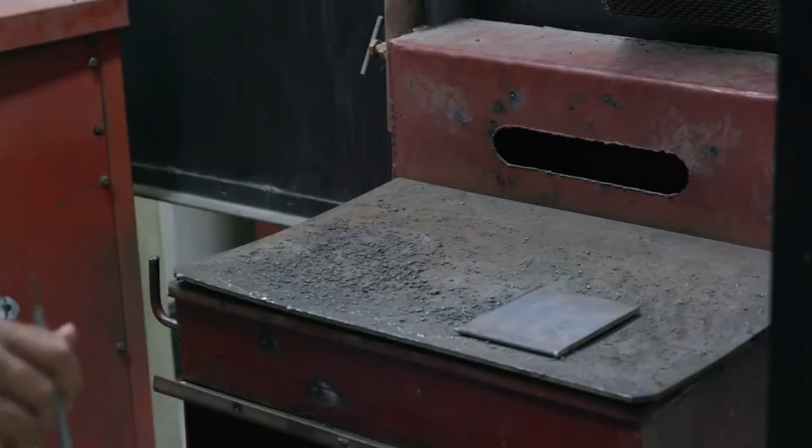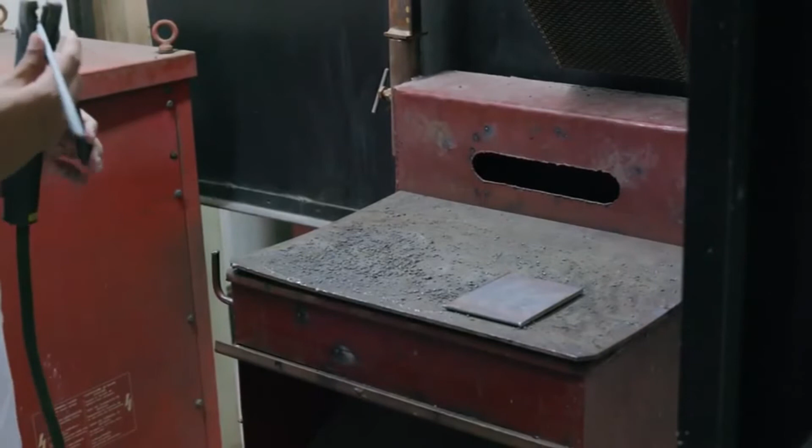In my hand is this welding electrode, and this is the electrode holder which will be used to hold the electrode. This is our work table, and this is the workpiece which we'll be welding. The work table is connected to the power source, and the electrode holder is also connected to the power source.

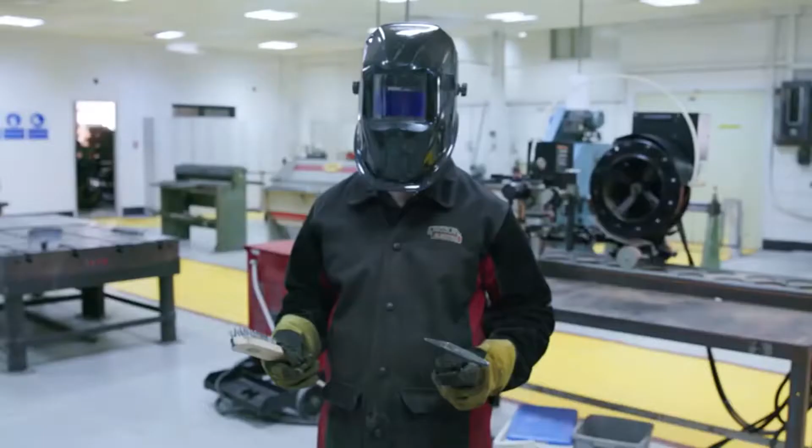Before we start any welding, there are some safety precautions we need to follow. While performing welding, we always need to cover our face with a face guard. On the hand we need to wear gloves, and while welding we should never touch the workpiece with our hand. There is always a hammer and wire brush to clean the material. These are the safety precautions we need to follow before performing any welding - face guard should be there, gloves should always be there.

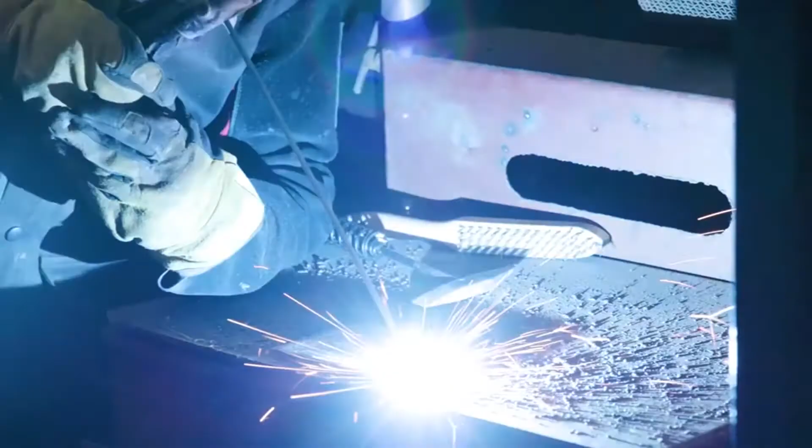This is how we perform the actual arc welding operation. The electrode rod is brought near the workpiece. When the electrode rod and the work table are both connected to the power supply, an electric current is passed through the complete circuit. Due to the passage of electric current, an arc is produced. Due to the heat generated, the metal gets melted and joined with each other. This is the basic principle of arc welding.

You can see the electrode is brought near to the metal surface. Due to the arc, metal is melting and welding is done.

Always you should follow safety - face guard should be there, gloves should be there.

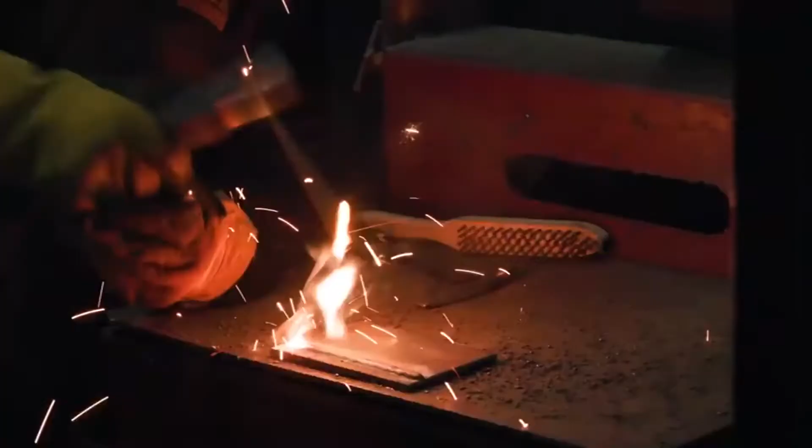You can see we are performing welding in a straight line. So this is how welding in a straight line has been performed.

To clean it, we'll use a hammer and a wire brush. Never touch it with your hand. This is the wire brush which will be used to clean the joint after welding has been performed. Never touch it with your own hand - always use the wire brush and the hammer.

This is the arc which was produced due to the passage of electric current.

As I said, this work table is connected to the power source, and this electrode holder is connected to the power source. We'll put the electrode inside this and bring it near to the workpiece. Due to the passage of electric current, current will pass through it and heat will be generated. Due to the heat, the metal will melt and get welded to each other. This is the basic principle.

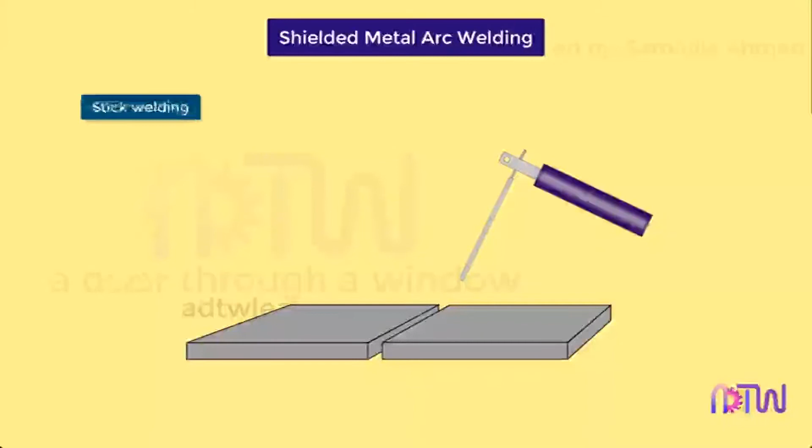Shielded metal arc welding is also referred to as stick welding or manual metal arc welding, in short MMAW, in which an arc is struck between the flux-coated consumable electrode and the base metal to start the welding process. It is the most common type of welding process seen in any job shop industry.

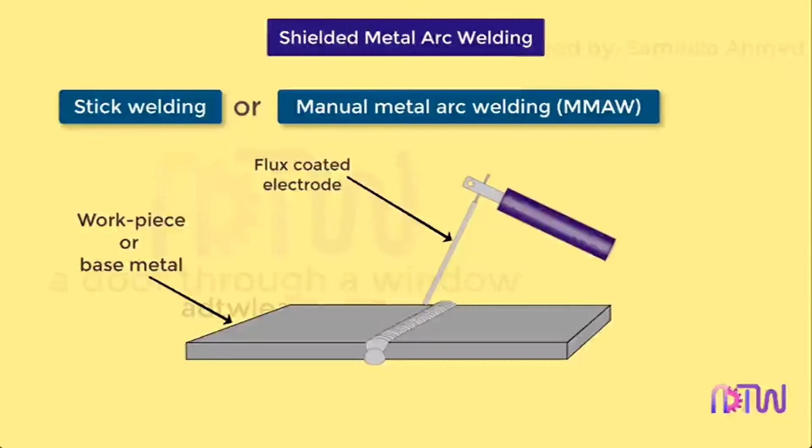Working principle: in this process, the heat required to melt the consumable electrode and form a bond with the base metal is produced by an electric arc struck between the electrode and the workpiece. The shielding for the weld pool is provided by the flux, some of which is deposited on the layer of the weld in the form of slag, which is removed upon cooling.

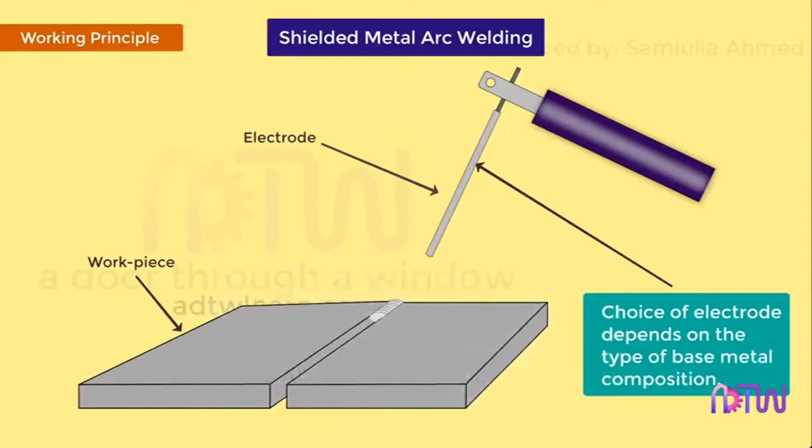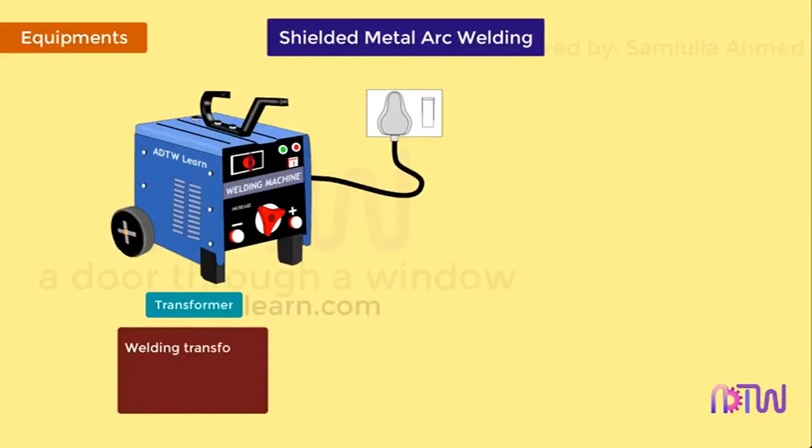The choice of electrode depends upon the base metal. Equipment or components of shielded metal arc welding: power supply - transformer. Most commonly, a welding transformer, a DC rectifier, or a DC generator is used. Other components include the electrode holder, electrode, and ground clamps.

Working: first, the power adjustments are made on the transformer. The welding can be carried out by either using direct current electrode positive (DCEP) or direct current electrode negative (DCEN) connection.

In DCEN, the electrode is connected to the negative terminal and the workpiece is connected to the positive terminal. The electrons thus travel from the negative terminal to the positive terminal, that is, from the electrode to the workpiece.

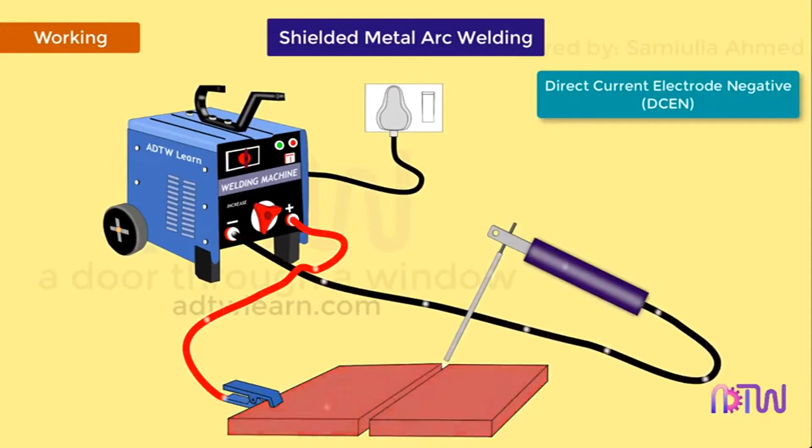Since there is a sufficient potential difference between the electrode and the workpiece, the electrons from the electrode accelerate and strike the workpiece surface at a very high velocity. Upon striking, the kinetic energy of the electrons is converted into heat or thermal energy, thus an immense amount of heat is generated at the workpiece surface.

About 66% of the arc heat is generated on the surface of the workpiece, and the rest is generated at the electrode surface. This melts the base metal quickly, resulting in deeper penetration. However, the deposition rate of the filler metal reduces due to less heat generation at the electrode surface.

DCEP. In this polarity configuration, the electrode is connected to the positive terminal and the workpiece is connected to the negative terminal, hence the flow of electrons is from the workpiece to the electrode. A major amount of arc heat is generated at the surface of the electrode and less heat at the workpiece surface, resulting in a higher filler deposition rate and insufficient fusion between the workpiece and filler metal.

However, when the electrons flow from the workpiece, the dirt and oxide layer is disrupted, also known as arc cleaning action, thus helping in producing a quality weld bead.

After setting the necessary current and voltage parameters, an arc is struck by slightly touching the workpiece with the electrode and carrying forward or backward.

Once the arc is struck, the heat generated melts the electrode and base metal, and the filler metal gets deposited on the base metal. The electrode should be held at a lower angle to the workpiece to initiate an arc

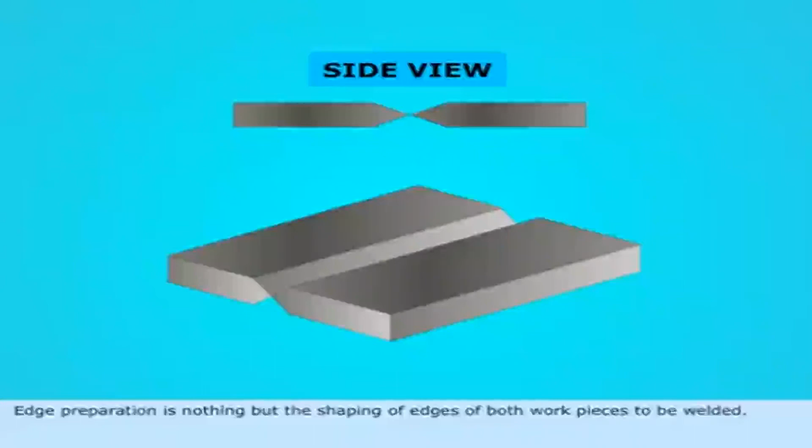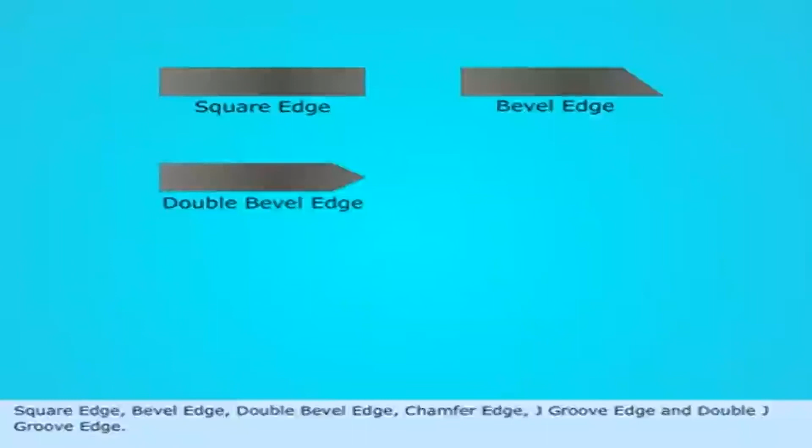Edge preparation is nothing but the shaping of edges of both workpieces to be welded. The most common edge preparations are: square edge, bevel edge, double bevel edge, chamfer edge, J-groove edge, and double J-groove edge.

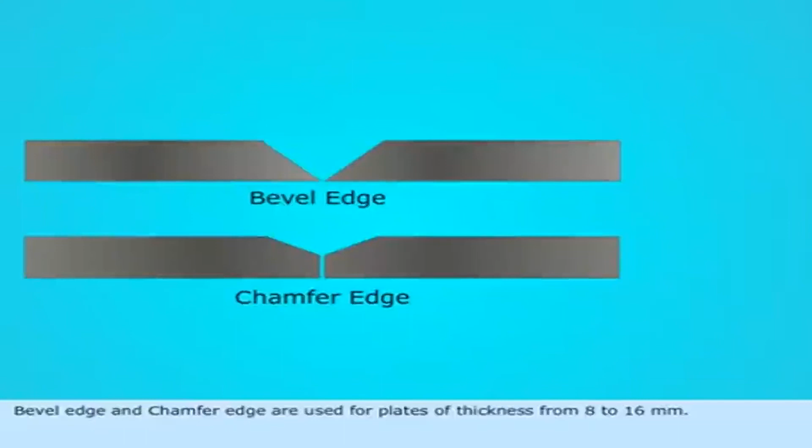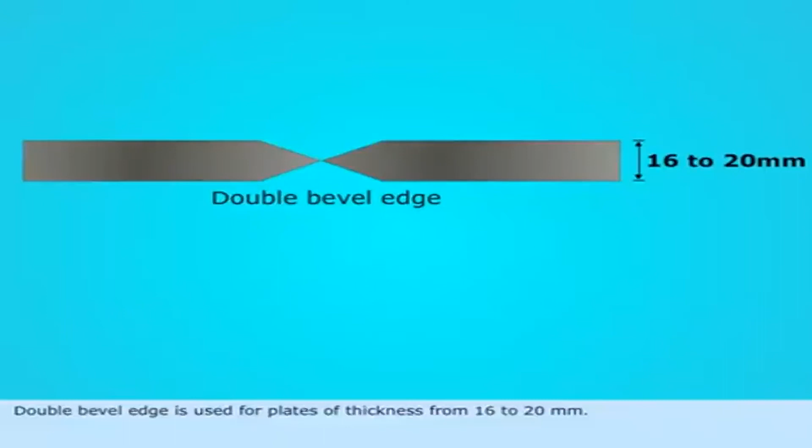Square edge is used for welding plates of thickness from 3 to 5 mm. Bevel edge and chamfer edge are used for plates of thickness from 8 to 16 mm. Double bevel edge is used for plates of thickness from 16 to 20 mm. Single and double J-groove edges are used for plates of thickness more than 20 mm.

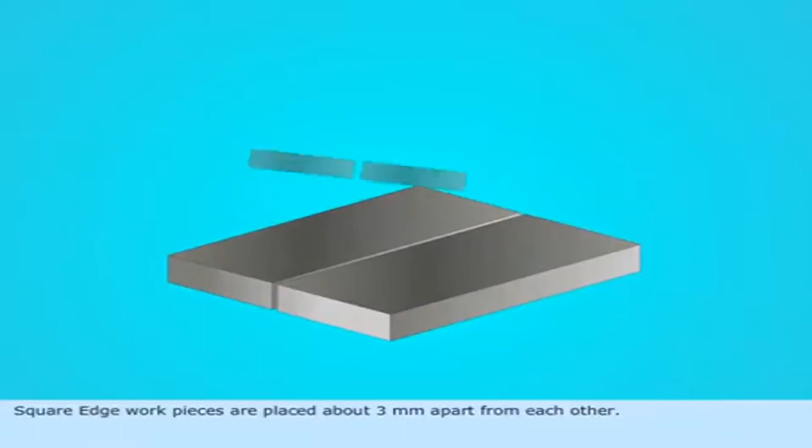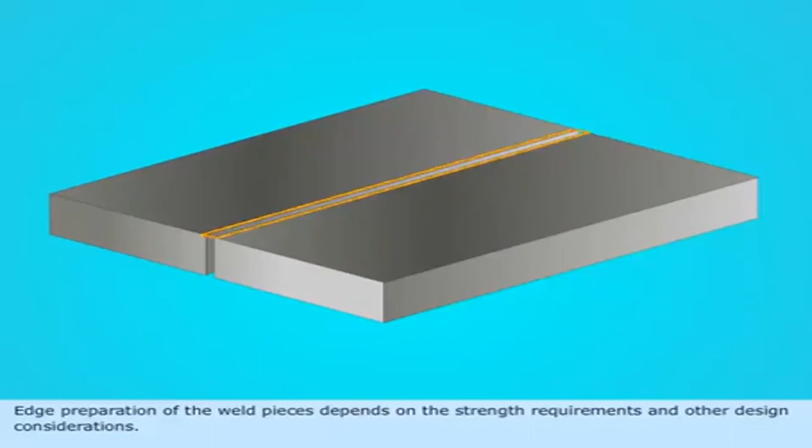Square edge workpieces are placed about 3 mm apart from each other. For the workpieces of double bevel edge and double J-groove edge, welding is done on both sides of the workpieces. Edge preparation of the weld pieces depends on the strength requirements and other design considerations.

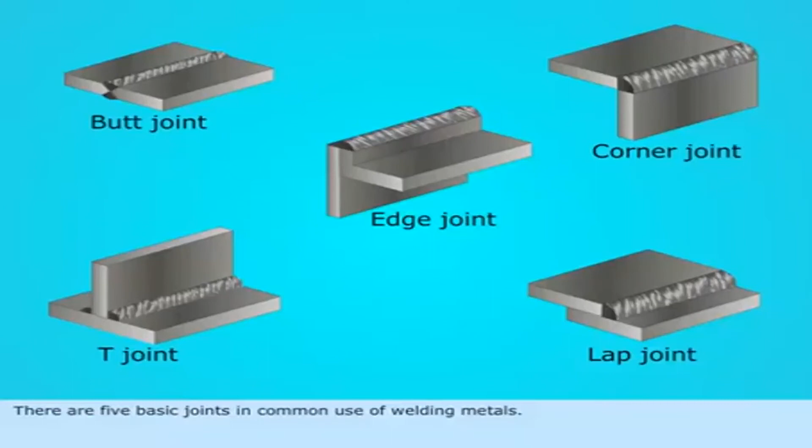There are 5 basic joints in common use of welding metals. They are butt joint, lap joint, T-joint, corner joint, and edge joint.

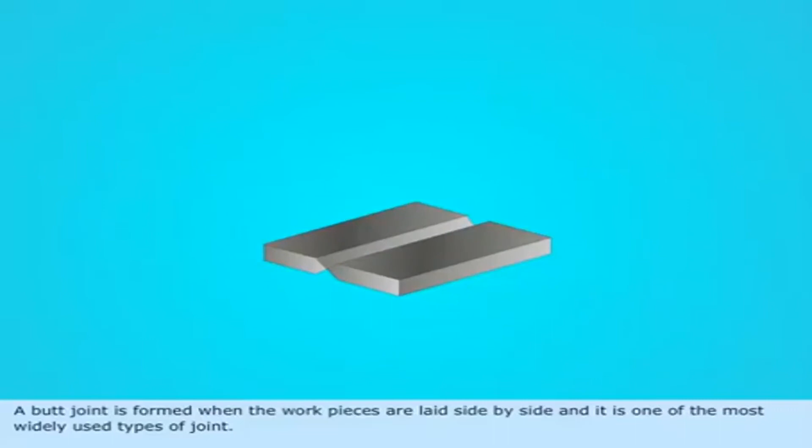A butt joint is formed when the workpieces are laid side by side, and it is one of the most widely used types of joint.

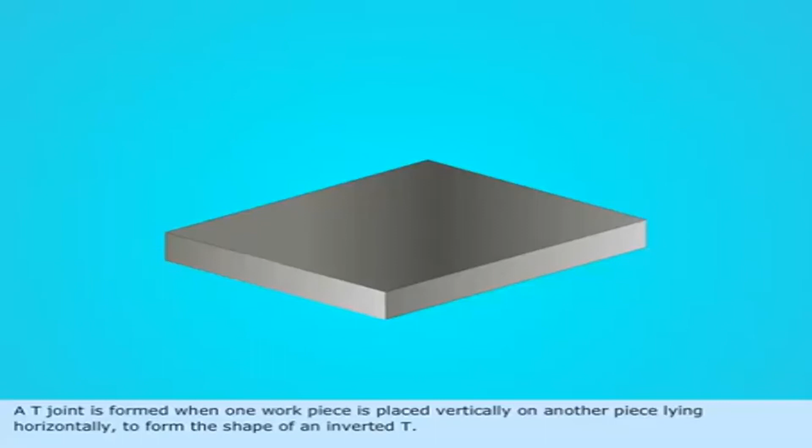A T-joint is formed when one workpiece is placed vertically on another piece lying horizontally to form the shape of an inverted T. The vertical workpiece is usually placed at 90 degrees to the horizontal workpiece.

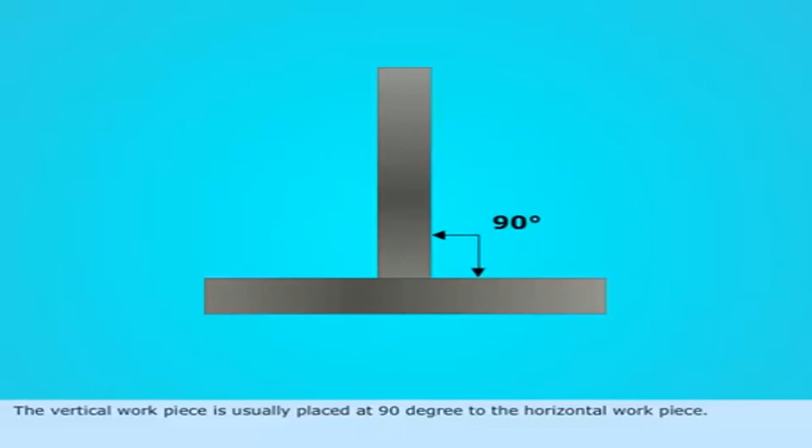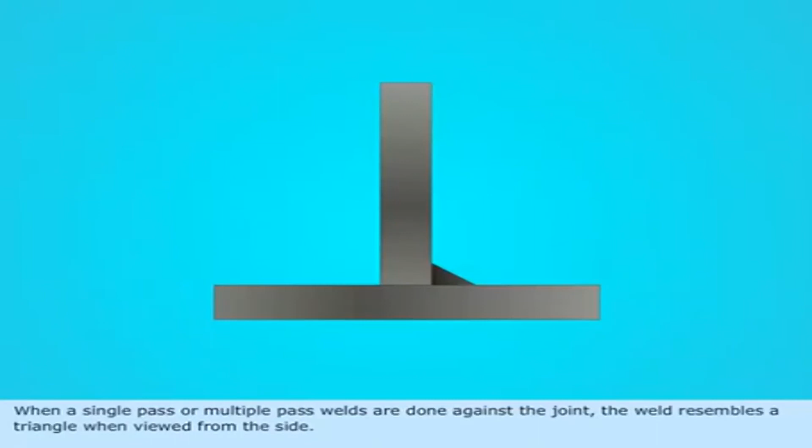Fillet weld is one of the most widely used types of weld applied to a T-joint. When a single pass or multiple pass welds are done against the joint, the weld resembles a triangle when viewed from the side. A lap joint is formed when one workpiece is laid down and another piece is overlapped to form an edge for fillet welding.

Lap joint is mostly used when welding thinner sections.

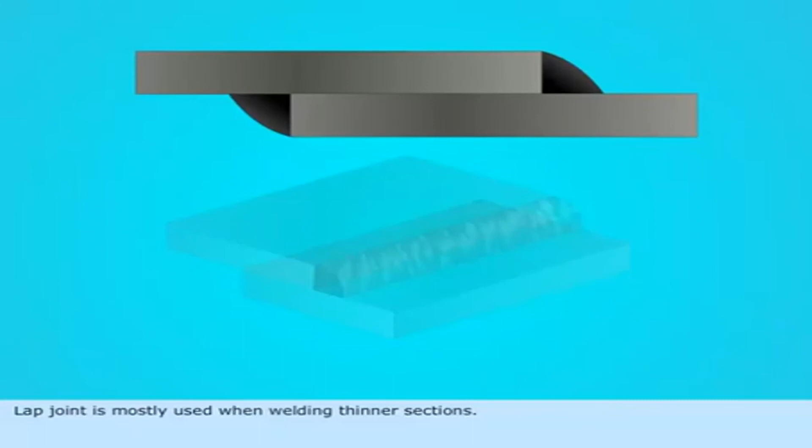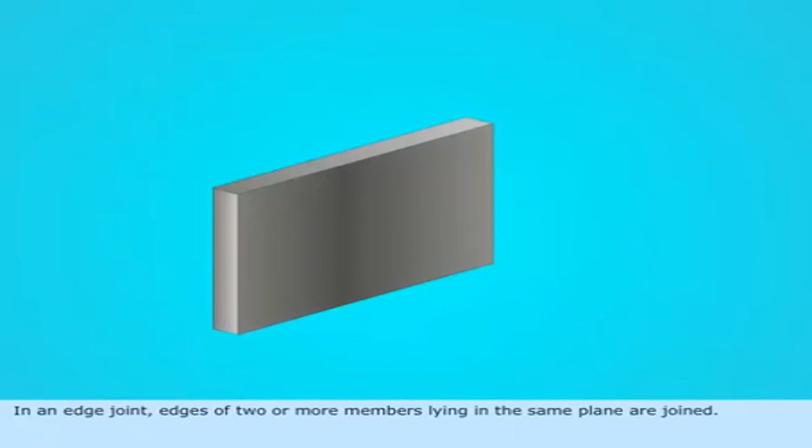In an edge joint, edges of two or more members lying in the same plane are joined. Edge joint is used for welding thin plates which are not subjected to heavy loads.